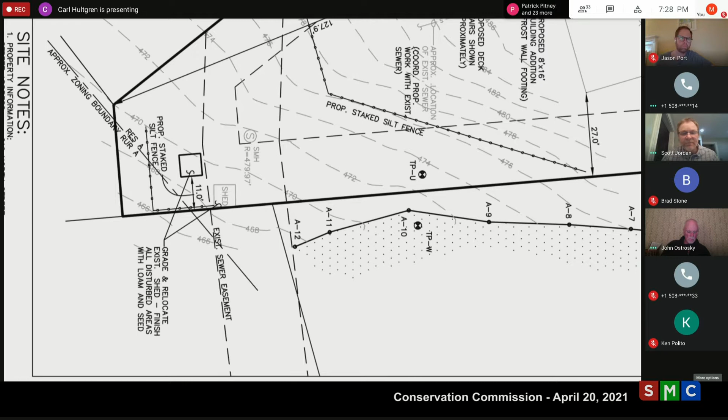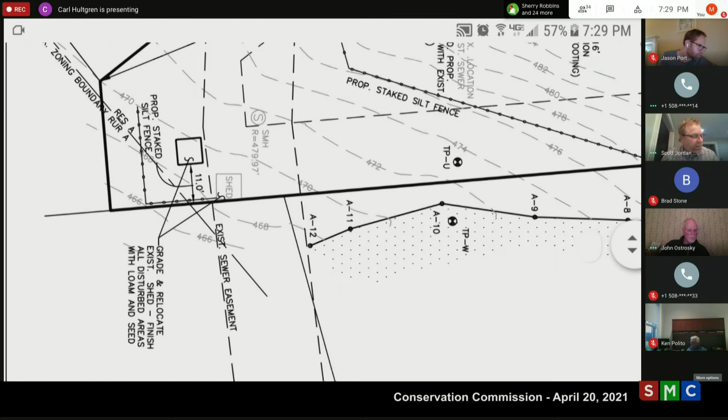Again, we will daylight the foundation drain. We will also have a silt fence down at the proposed shed location, in case we have to level that shed a little bit. That is actually the proposal, and I'll turn it back to the board if they have any questions.

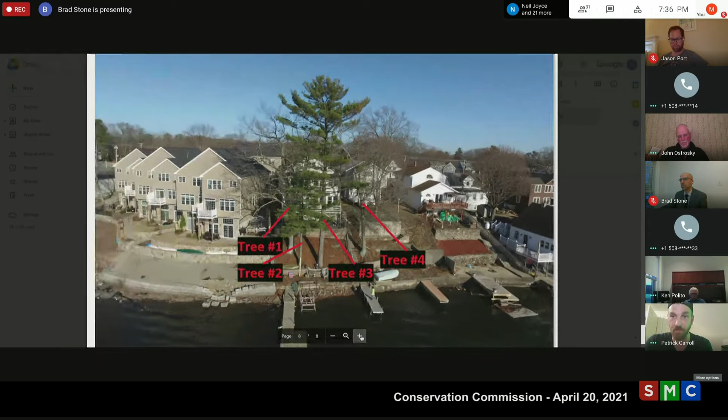Can you keep some of these trees? You have to take them all down? As I was saying, I would recommend taking them all down. Tree number 4 is on the adjacent neighbor's property. The walkway, as you can see, there's a walkway coming down, stairs coming down to the beach area, with a retaining wall behind it and to the side. There's just no real room for the root mass to expand further to support any weight as it continues to grow. It's just the natural course of a tree. They grow for sunlight, and those ones have a lot of sunlight now that all the neighboring trees have already been removed.

I'd like to see a report, at least from an arborist, saying what condition they're in, and I don't know how we can allow you to take a tree down on somebody else's property. The neighbor had given permission to have it done while the crane was there, as a matter of economy, since if they have to pay to have a crane come back, it's going to be a significant portion of that job's cost. It's a lot less to add than it is to come back, in essence. So they would have been happy to, but if the neighbor doesn't want it taken down, then that's fine. They were more than happy to have it done and included in the price, I should say.

We can get permission for that at a later date. Not at a later date. If we want to return to this meeting—

As I'd said, it's not a question of the defects within the trees, in that a tree has a natural lifespan, and those don't have much room to grow in a pretty congested area. I don't anticipate that they're going to fall toward the lake. I imagine when they do fall, they will fall toward a populated area. I just had a friend crushed by a tree. It's a regular thing in my line of work, so a lot of people don't look at them the same way I do, I would say.

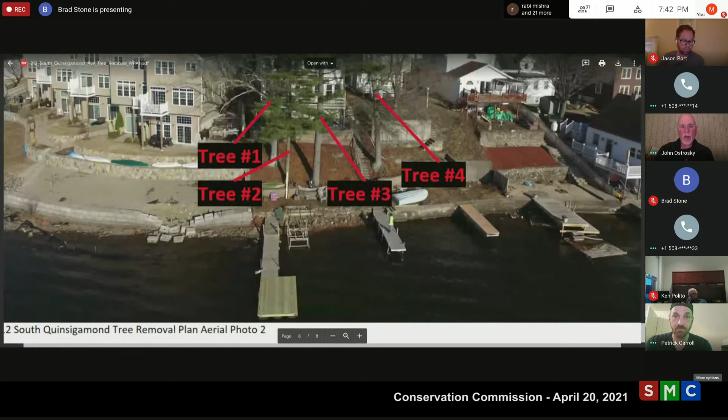All right, let's see if anyone in the public is tuned in to this. Does anyone in the public have any questions or comments on this hearing? All right, I'm not hearing any. How do we want to proceed at this point?

Ken's raised some concerns. Ken, you were looking for an arborist to actually assess some of the conditions, but I know Patrick looks at it a different way, with his two-target and lifespan type approach.

Trees are the silent killer. No, I understand - I'm just concerned that if they could be saved, and if they're in good shape, and an arborist gave us a report saying so, fine. We're losing a lot of trees on the lake, and it's habitat, and it's shade, and it's something I think we're all concerned with.

The only thing is, these are tall trees. They are tall trees. And if they do fall toward the house, they could probably strike any one of those three houses.

And that's 3 targets more or less, in a way that I see. And I understand what you're saying, Patrick, about the proximity to the retaining wall, no place for the roots to grow. Yeah, that's what anchors the backside of the tree. No, I understand. I hate to see the trees go, to tell you the truth, but I see your side of it too.

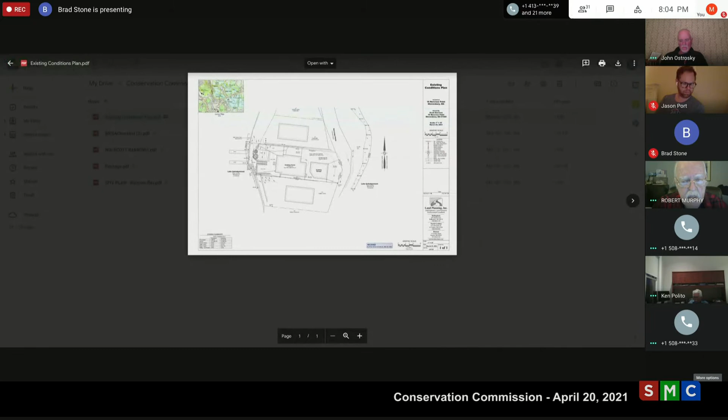And the new deck will be similarly 12 feet off the house? Yeah, the deck is pretty much 15 feet. Yeah, this plan says existing, and on this plan it's 15 feet.

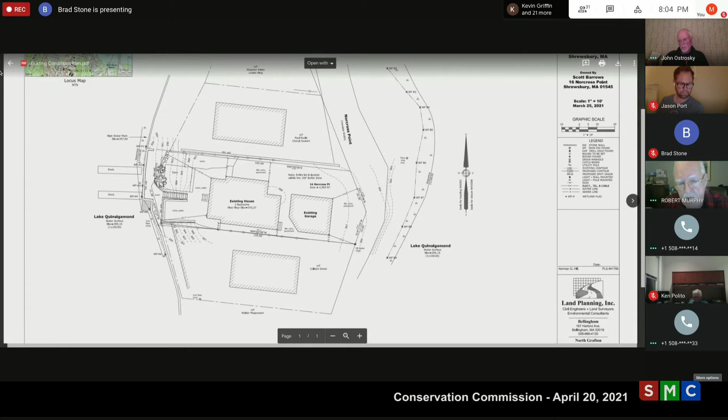Well, if you look at the deck here, on this portion there were actually two decks. There's a deck on the house, and a second deck that right now goes right up to where the tree is. That's going to be removed, so the distance from the deck to the water will actually be increased. That whole area is going to be landscaped.

Well, I still don't see where you say that. I don't see where the deck is on this plan, the existing deck. And I see a new deck going out 15 feet from the new proposed house.

Yeah, the existing deck goes all the way out to the tree. It's not shown on this plan because it's going to be removed. But the previous plan you had showed it. The deck goes right out to the tree.

And my next question is, does this application include the replacement of the retaining wall, the repair and replacement of the retaining wall on the lake? It does. If you look at the plan, it has a note that the stone wall is to be repaired, and again that would be during the drawdown. But yes, to repair the wall is part of this application.

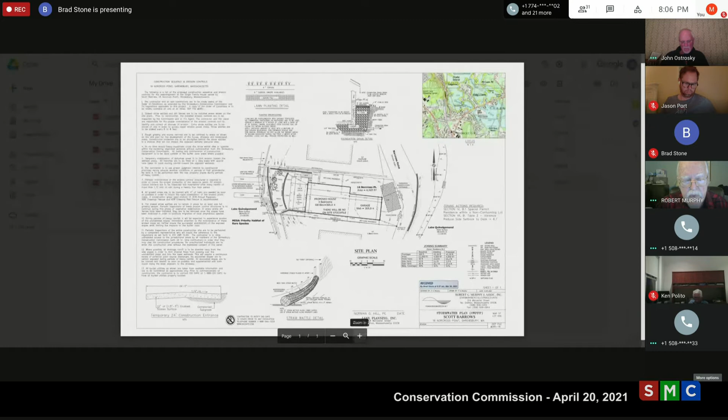Okay. Well, I guess I would defer to Brad, but it would seem to me that we would need some design specifications for that retaining wall. We could, it's a stone wall, if we're going to approve this, I don't know if I have them. Well, as I said, I'll defer to Brad. So that's it for me, Mr. Chairman. Okay. Ken?

I'm all set for now. All right.

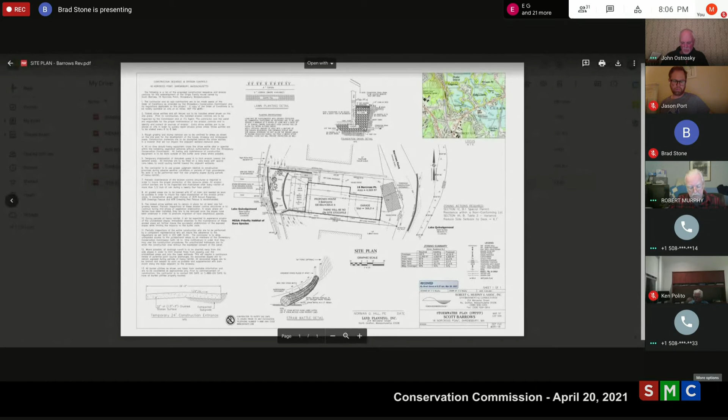If Brad, if I might add some more information here for you. Go ahead.

We are in an area of endangered species habitat or priority habitat. So we have made a filing with the Natural Heritage people, and we have not received a DEP file number for the project, and we have also not heard from the folks at Natural Heritage. Just wanted to make you aware of that.

So I had the same concerns, question as Bob, just with that retaining wall as to what was going to be involved with the repair, because that can mean a lot of different things to different people. I've seen a simple repair note turn into a complete replacement of a wall, some different materials, different height, that kind of thing. Also, depending on the height, you may need a building permit for it as well, and that may lead you into having to do a replacement versus just simple mortar repairs or something of that nature. So I think some more thought needs to be put into what exactly needs to be done to that wall, and that needs to be specified on the plan.

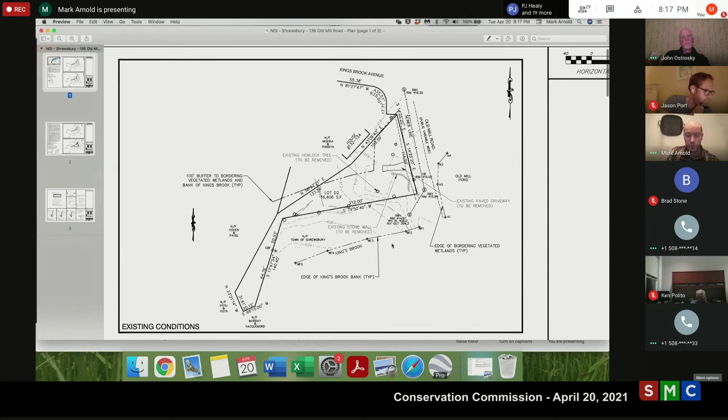As background, this commission did issue a positive determination in November 2020, determining that Kings Brook is actually intermittent, which creates a 100-foot buffer zone from the bank of the brook. You also have Old Mill Pond across the street, which also has a buffer zone off it. So this is the 100-foot buffer zone right here, and going back over here, you can see that label. Those are the existing conditions on the site.

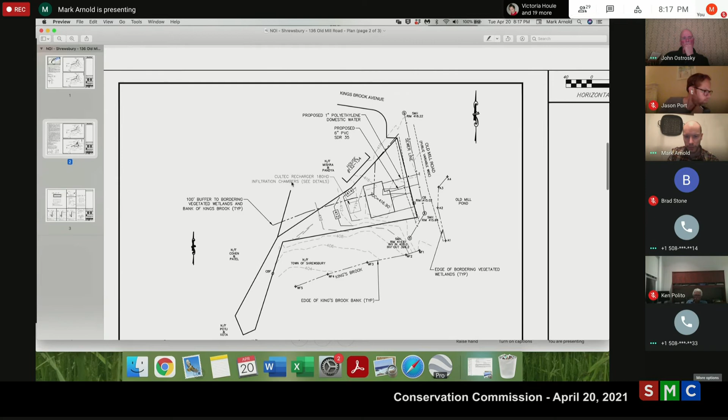The proposed notice of intent is for construction of a single-family house. I'm going to go to the plan showing the erosion control during construction. We have a proposed stone construction entrance, proposed single-family house, some minor grading here. You can see the 414 being pulled out slightly, and the 412 being pulled out slightly, but fairly minor. We have that one tree back here coming down along with the one up front, and a temporary stockpiling area up front.

The house will be served with sewer and water off the front. You've got proposed silt fence and straw wattles along the property line here. Based on the buffer zone line, the property is plus or minus 50 feet from the edge of the actual riverbank down here, so we have a pretty good distance from the river itself. We have erosion control proposed to prevent any impacts, and we would request the commission issue an order of conditions to allow this work to proceed.

Are you ready for questions, Mark? Yes. Martha? Don't have any questions at the moment, thank you. Jason? I don't have anything just yet. Bob? All set. Ken? All set.

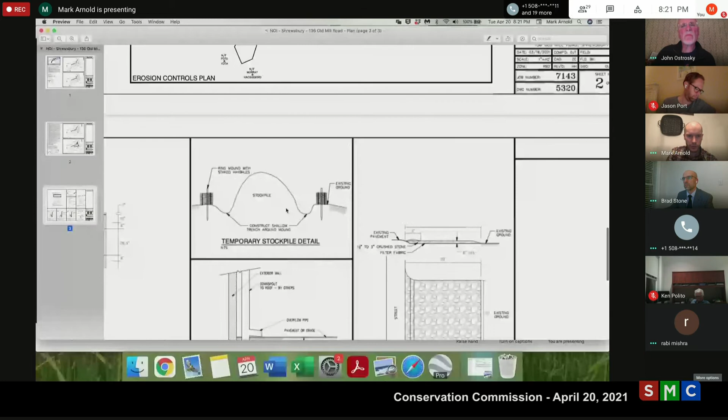Understood. One thing I forgot to note in my presentation is that we do have Cultec infiltration chambers proposed in the back of the house, located right here, where that 414 contour comes out. We have a detail on the detail sheet. The chamber system is 17 feet by 16.66 feet, so it's a 5x6 unit, 180 HD Cultec system proposed for the roof runoff.

Okay, I do appreciate that. As these regulations are fairly new, a lot of times consultants aren't aware of them, and our regulations tend to go above and beyond what the Wetlands Protection Act requires. So if you've sized it in accordance with the stormwater management policy under the Wetlands Protection Act, even though this lot isn't applicable, it may be undersized or not meet what's required in our stormwater management bylaw. Just be aware of that, and make sure somebody on the design team is going through all the regulations before this gets closed out. Understood, Brad, I appreciate you bringing that to our attention.

And then the thought I had, just because we deal with this quite a bit in town, is whether there can be any landscaping or consideration along that southerly property line to prevent encroachment. We're dealing with this issue on a number of our town parcels, and that building is pretty close to the property line there. I can see a new homeowner, in the blink of an eye, destroying the vegetation on our town parcel and trying to create a lawn for themselves.

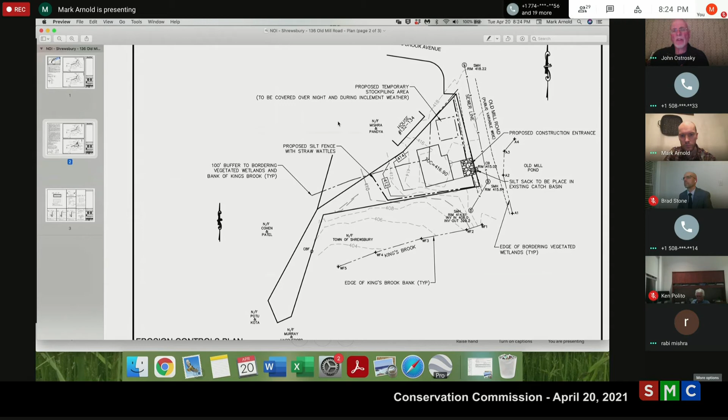Mark, before we go to the public, again, what are the utility connections to this home in terms of potable water and sewage? There's town water and sewer in the street, so we have a plan showing the proposed 6-inch PVC from the house into the town sewer, and then a 1-inch domestic water line into the water main in the street as well, off the front of the house. So it looks like, with the size of that pipe, it's a gravity sewer feed to the town line.

Good, okay. All right, at this point, let's go to the public with any questions or comments. I do have, Chairman. Please, state your name and your address. Okay, sorry, thank you for this opportunity. I am from 134 Old Mill Road, my name is Rabi, and I am the adjacent property owner. I have 3 comments and a quick concern, which I will go through very quickly.

My three concerns are: it is determined that the stream is intermittent.

Based on that, it is dried for 4 days. So has the conservation board taken into account why it dried? Because the source of the water is the adjacent big lake, which is never dried.

The second question is, this Kingsbrook was built in 2008. Whether any previous application has been denied, and if yes, how many, and what are the reasons and what changes? My third comment is, the property will be very close, maybe within very few meters, and the applicant is asking to cut a tree within the vegetated wetland. How will it be possible that the construction will not affect the wetland or any vegetation? These are my 3 concerns, comments.

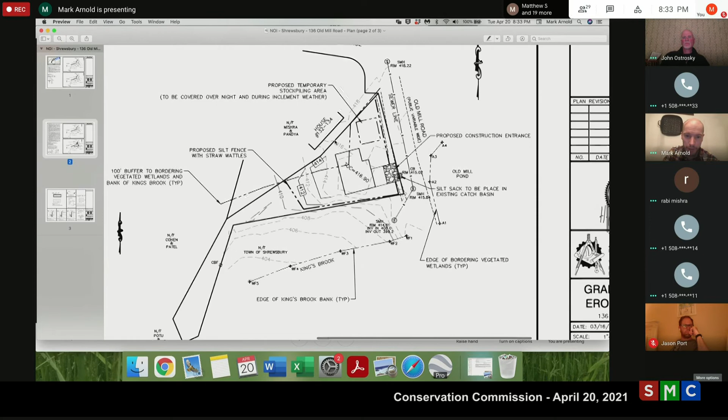If this is 100 feet from this wetland flag up to this line right here, that's 100 feet. The space between this house, the one you're talking about, and the property line looks like it's about 10 feet. Thank you, thank you, I don't have any questions. My request to the board is that they will take a reasonable decision based on their history and all the information available. Thank you very much.

All right, do we have any other questions or comments from the public tonight? Hello, Mr. Chairman and the board, my name is Suresh Ural, I live on 15 Kingsbrook Avenue.

I do have some concern regarding some of the things I read, based on what Mr. Arnold mentioned. He himself called this stream a river, which is what it is as I read through the WPA regulation. Also, Mr. Arnold mentioned the status of calling this intermittent was based on what is feeding the pond over there. Now, we live here, we see this throughout the year, and we have not seen it get dry at all. The part of the stream closest to the proposed house construction is fed by the pond, and the pond never dries.

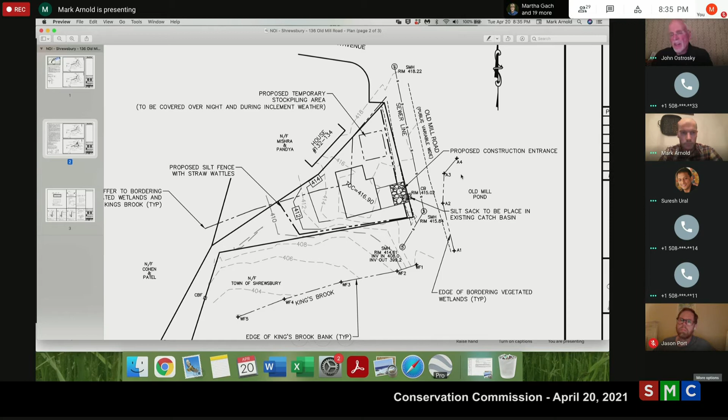Suresh, can I stop you there? We've been through this determination on the status of that stream, it's been in debate for years, and they did their due diligence going out and measuring and observing stream flow and documenting it, and it met the criteria to be an intermittent stream. At this point, we can't change the status to perennial, which I think is what you're getting at. We've got a lot on our plate, and this isn't one of them, because it's been debated in the past through public meetings, and we've come up with the opinion that it is an intermittent stream. They've proven it, and there's nothing you're going to offer tonight that's going to change that.

So it is what it is, you met the definition, so if you have any comments regarding the project as it applies to the Wetlands Protection Act, now in the 100-foot buffer zone, we can entertain that. Thank you for the information, I appreciate what you said.

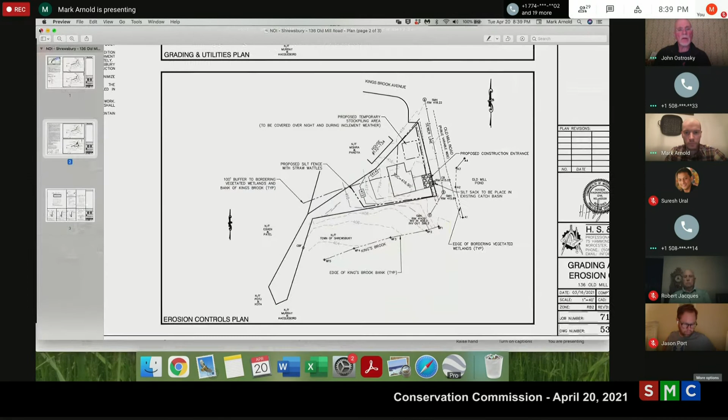Are there any other people from the public who wish to make any comments here tonight? Hi, good evening, we would like to make some comments. My name is Dr. Liz Garwood. I live at 151 Old Mill Road, essentially across the street from the proposed development. I'm here with my husband, Dostar Powell. Can you hear us okay?

Yes, okay great. So we love this area. This is a very special area here on Mill Pond and the egress of Mill Pond, which is Kings Brook. And I think that's why you're hearing some really passionate pleas about this project. So since receiving this notice, we've done a little bit of research to try to understand this process. I've read the Shrewsbury master plan, I've reviewed the zoning maps, and I just want to make sure this application is in line with Shrewsbury's goals for residential development.

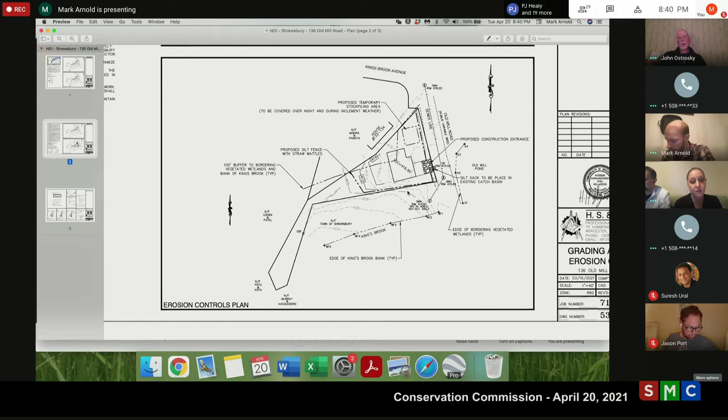And when considering this plot of land specifically, I have 4 concerns. One is the density of development, and I think it's a little bit difficult to appreciate just from this map how tight of a fit this house is going to be wedged between an existing house in the wetland, and Old Mill Road is already densely developed. Number 2, which hasn't been raised yet, is traffic safety.

All right, can I stop? I know where you're going with these 2 questions. Nothing to do with Conservation Commission. It has to be pertinent to the Wetland Protection Act, and they have a right to build if they can meet the requirements of the zoning bylaws and the Wetlands Protection Act in this case. So traffic doesn't apply. The housing density doesn't apply. So if you have other questions regarding the wetland, let me try 2 more.

You know, this is a very biodiverse area. The pond and the surrounding land supports that could potentially be impacted by additional development around the pond and the pond egress. Right, and we try as best we can to minimize any impacts to any of the wetland resources.

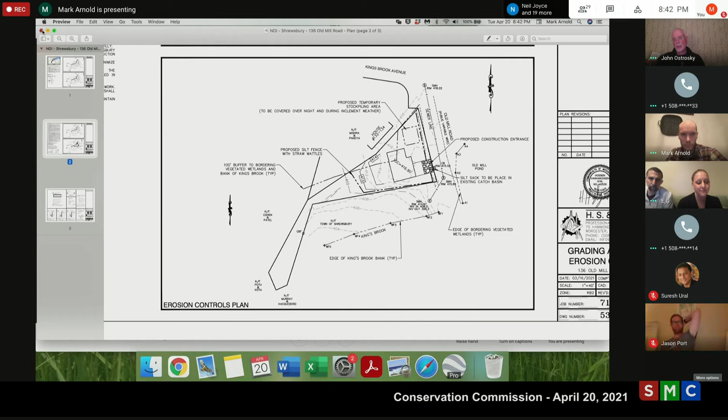We have minimum offsets to the wetlands, to the building, and the town guidance we've had for years. We try that on every project, so we're on board with you there. But they do have a right to build on the property, and you can't deny them that right if they meet the zoning requirements and the Wetland Protection Act requirements. We're working for you, we all are in town, that's why we're here. But okay, great. Yeah, the housing development stuff, that's the master scale type planning that we're not involved in.

Okay, and we're going to be back next month on this hearing too, so if you're still interested, tune in on May 18th.

Sorry, this is Dr. Dostar Powell. So this is going to be a continued public hearing, is that correct? Correct. And is there any, so this commission I understand is for the wetlands, but in regards to the historic and or traffic and other safety concerns, what would be the proper forum to discuss that? Planning board, but this doesn't even meet the need, I don't believe, to go to planning board. So you're basically looking at the zoning is what regulates what's a safe development.

The property is located on Route 20, Hartford Turnpike. And the wetland resources are located to the west side of the property. You can see two sections here. There's a 100-foot buffer zone from the bank, and there's a 200-foot riverfront area that ends from the point where the perennial stream begins.

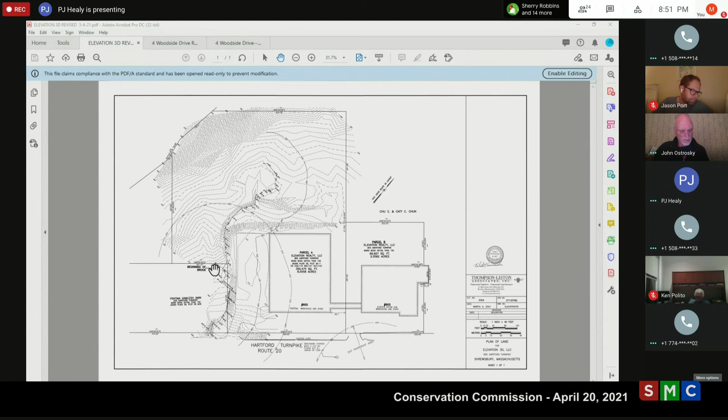What's the basis for your measurement? Is it stream bank? This is Nicole, yes, from Goddard Consulting. The river starts according to the USGS map. It's located on the plan. It says beginning of brook at R1. This is where it starts to become perennial on the USGS map, which is the regulating authority.

Also, this riverfront area has been looked at for the adjacent parcel just within the past few years. I believe EcoTec did a line that was reviewed by the commission and agreed upon as the start of the riverfront area. So this resource has been looked at in the relatively not-far-away past and determined that the start of the river was at that point.

This is the stream that's the headwaters of the stream that goes by the Christmas tree shop property, correct? It crosses Walnut Street. It crosses Hartford Turnpike, that's for sure. Let me look on the USGS. Has Brad been out? Isn't it closer to that storage place? Yeah, yeah, okay.

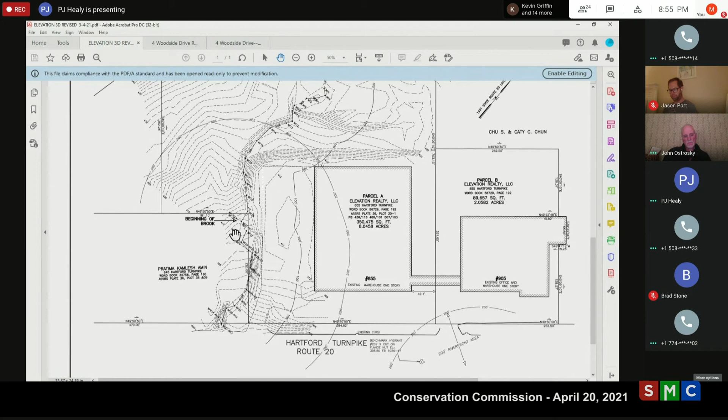Again, this is Nicole from Goddard Consulting. I looked at the USGS map, which is the regulatory authority on the riverfront. And when I was in the field, I was looking at the USGS map and the property bounds and lines. There's a culvert right where I put the riverfront flag number 1. There's a culvert.

Up gradient of the culvert, the stream channel doesn't look like it's used as much. The staining wasn't very prominent, and there wasn't much undercutting in the channel.

South of the culvert, there was actually flowing water during the delineation, which wasn't flowing above the culvert. The channel was much more eroded, with stained leaves. The evidence I used for the start of the riverfront area was some old EcoTec flags.

When I talked to Brad, I called him while I was in the field, and he remembered there was a previous notice of intent that had that channel in it, which was the start of the riverfront area used in a previous filing accepted by the commission.

So with all those parameters, that's how I determined the start of the riverfront area. We can look at it together in the field, but with all those parameters, that's how I determined the start.

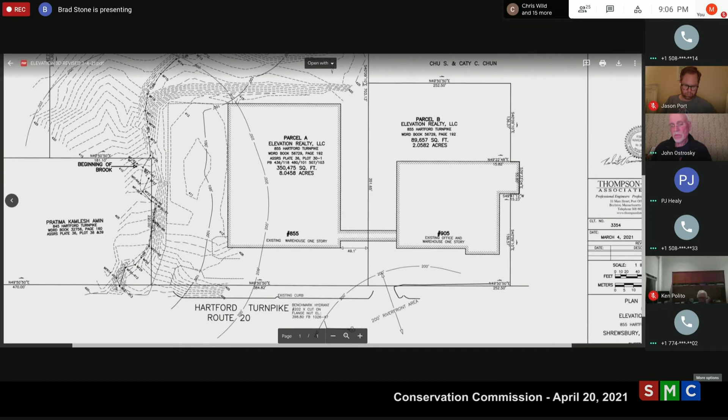Notice is hereby given in accordance with the provisions of General Laws, Chapter 131, Section 40, that the town of Shrewsbury, 100 Maple Avenue, Shrewsbury, has filed a notice of intent for the demolition of the existing police station and construction of a new police station with associated site improvements at 100 and 150 Maple Ave. A public hearing will be held on the above notice at 7 p.m. on Tuesday evening, April 20th, 2021.

Okay, who's presenting tonight? This is Victoria Houle with Fuss & O'Neill. I have on the line with me Amy Bell. I will give you an overall sort of site visit.

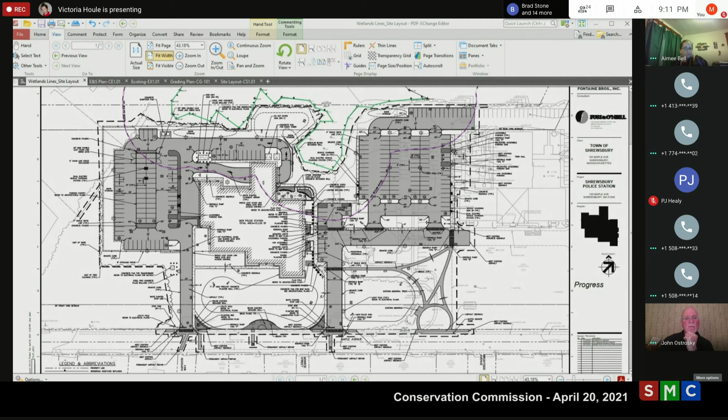Stormwater features: test pits were performed on April 7th after the initial notice of intent was submitted. I believe Brad Stone was out on site to witness a majority of those. Data showed that groundwater was higher than what the initial geotech borings had suggested, ranging from 12 inches to 52 inches below existing grade. Test pits were completed at each of the former locations where stormwater was proposed. However, due to the groundwater, we have redone the stormwater calculations, and if I may, I can bring up an updated plan for that.

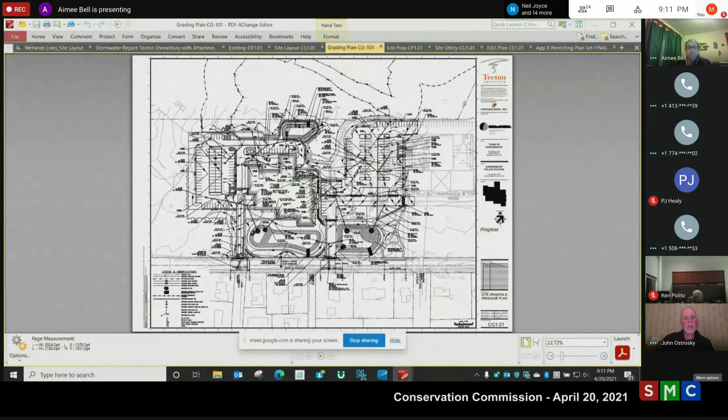Come on. Can everybody see that? Yeah, the scale is so small, it's so difficult. Yes, I will zoom in. Is that better? Better, but not great. That's better. Okay.

So the stormwater design has been adjusted and redone to account for the groundwater. We have eliminated all of the underground infiltration chambers previously proposed and replaced them with three bioretention basins: one up here in the north, in the area previously proposed; one down near the road, where originally we had a small one, now enlarged; and another one down by the road, also originally small, now enlarged to accommodate more stormwater.

These stormwater bioretention areas have been designed to meet the stormwater handbook to the maximum extent possible, given that one portion of the project is redevelopment, and two, due to the soil types currently on site being C's and D's with high groundwater. The standards have been met to the max.

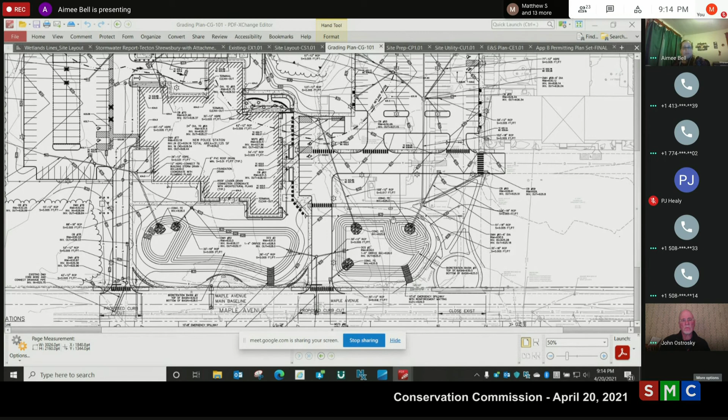However, the basins have been designed, and the project has been designed, to meet at least 80% TSS removal. That TSS removal will be completed through the bioretention basins currently proposed, plus stormwater treatment structures similar to a Vortechs or a CDS unit, and deep sump hooded catch basins. All of the treatment BMPs have been sized to meet the 1-inch water quality volume.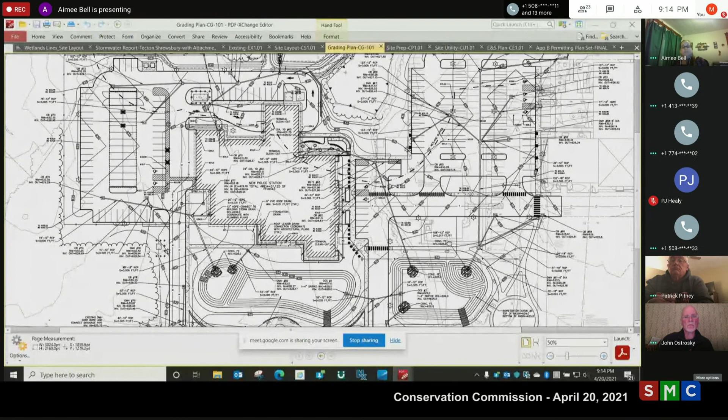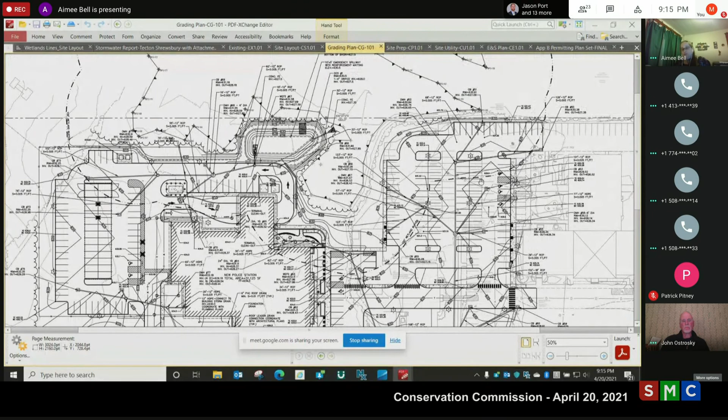Erosion and sediment controls are proposed on the site in the form of construction entrance pads, one at each new driveway location. Silt fence backed with straw bales will be proposed around the back perimeter where the wetlands are, to ensure no sediment enters the wetlands. Catch basin inserts will be proposed within existing catch basins located in the town hall area and along Maple Ave that may be affected by the project. ESC matting will be proposed on any slopes greater than 3 to 1.

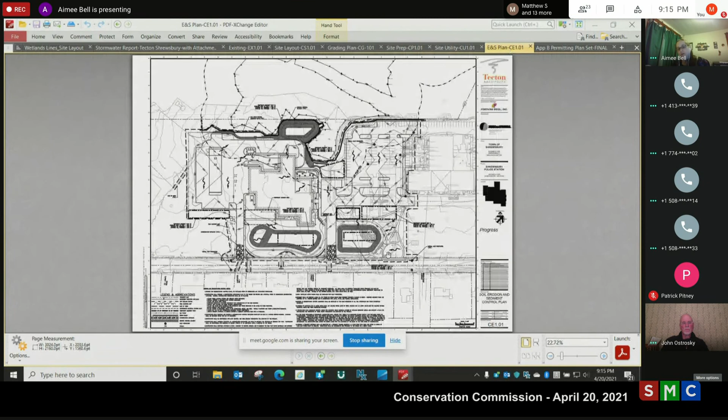There are also temporary sediment basins proposed for during construction, shown on the ESC plans — one down over here, one down in here, and one up in this area, just to make sure we catch stormwater during construction.

The contractor will be responsible for preparing the SWPPP and the construction general permit for construction. Operation and maintenance control plans are proposed for the stormwater BMPs, included with the stormwater report. The revised stormwater calculations, grading plans, and plans will be completed and provided to the commission and to the planning board for the stormwater permits when those are completed. We are hoping to do that by early next week, the week of April 26th.

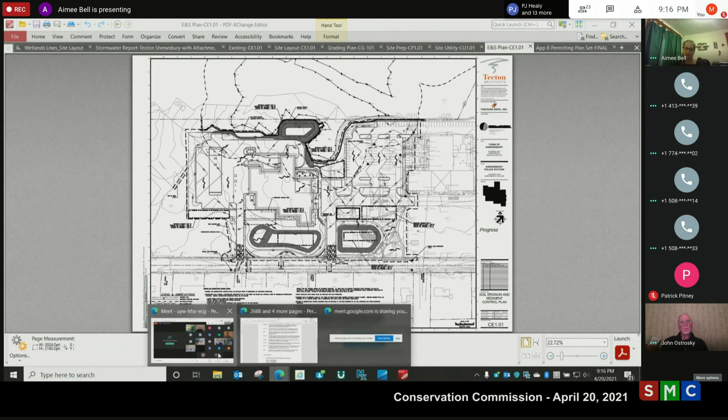That's it at this time. If anybody has any questions, or Victoria, if you have anything else to add. I think we can open it to questions. We did submit for the stormwater permit through the Department of Public Works. Also, there's a site plan hearing with the planning board upcoming, and we will be submitting the updated stormwater materials to all of the entities.

Okay, let's go to questions from the commission. Martha? So that's really interesting, you had to completely change your design. So I guess one of my questions is, these bioswales are accepting stormwater runoff from the building as well as the parking area? Yes, that is correct.

Where they're located in the front of the building and so close to Maple Ave, I just wonder if there is a way to think about them as a design element that is more than just structural to solve the stormwater problem, but could be used as a model of up-to-date ecological techniques for above-ground management of stormwater. I don't have particular things to suggest, but perhaps you do.

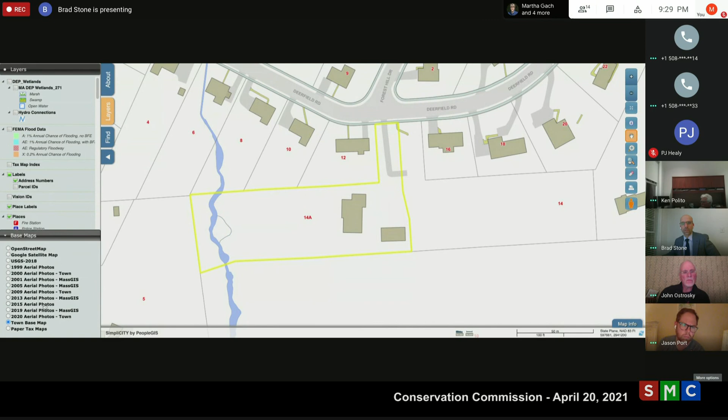So this was brought to our attention that there was some recent activity on this particular lot. I'll pull up the base map too. So you can see the perennial stream off to the westerly property line area through here, and that would be riverfront. This is the 2015 aerial, and here you have the 2020 aerial view.

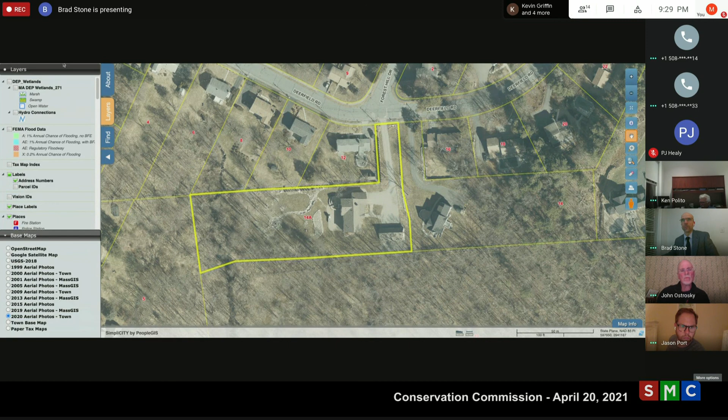You can see there's a lot of the forested area within the riverfront removed in this particular area for this landscape. I have not met with the homeowners or walked the property, but I did walk the Conservation Commission owned parcel just to the south over here, and was able to observe what was there and look a little closer at the stream. I'll share that photo too.

The enforcement order that I've been drafting has been taking a little time because internally our records don't seem to have the right info for the owners there. So I've been digging a little deeper into the title just to make sure I've got all the correct info. I have run into that problem with enforcement orders in the past, and it's caused all kinds of problems and delays, and I'm just trying to avoid that. But essentially that's what's going on with that particular property.